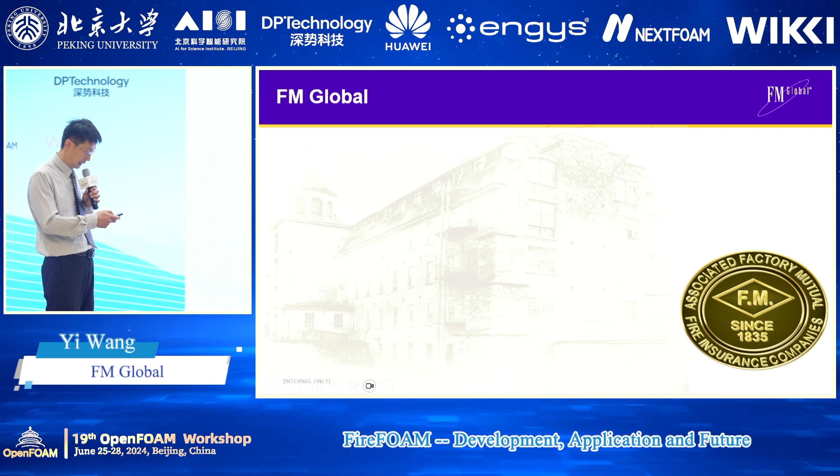Okay, first, what is FM Global? Who is FM Global? FM Global was established around 200 years ago, 1835. We are the largest insurance company - only problem is nobody knows about it, because we don't really insure individual properties: no cars, no residential houses, no health insurance, no life insurance, we don't deal with that. We only specialize in commercial and industrial properties. If you happen to work with one of the large corporations, like Huawei or Intel or Boeing, the likelihood of your company being insured by FM Global is about 30%. That's why we are the largest insurance company in this industry sector.

The company believes the majority of loss is preventable. This loss prevention is achieved by research and engineering. That's why our work is relevant - we can see how our CFD work comes into play, right?

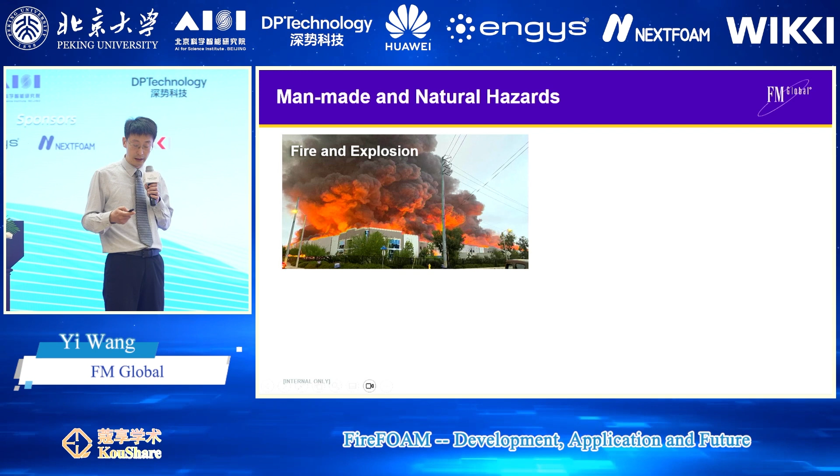So the kind of hazard and risk the company deals with is fire, explosion, and also equipment hazard. There's a picture that's missing, I don't know why. But also all kinds of different natural hazards: earthquake, hurricane, wind, flood. But fire and explosion actually account for roughly 50% of our loss as an insurance company. So it's very important for us - that's why we need to understand our risk.

This is a typical problem our engineers are facing. When they walk into a client facility - looking at this kind of warehouse, distribution center, or manufacturing space - we basically see a lot of combustible material, which could be anything: plastic, battery, cardboard, wood, fabric. They can also be stored at certain heights, under certain ceilings, with all kinds of different configurations - the flue space, the aisle - all those things matter in terms of how fire develops and how big the risk will be.

And also we need to figure out the suppression. Basically, our engineers will ask: how bad will the fire be if there's ignition? That's a risk evaluation. Will the sprinkler, the fire protection, work if there's a fire? If not, what do we need to do? Should we change our design? Should we change the protection? That's risk mitigation. Or should we change the storage configuration? And also, if the risk is too big, what should we tell our underwriter?

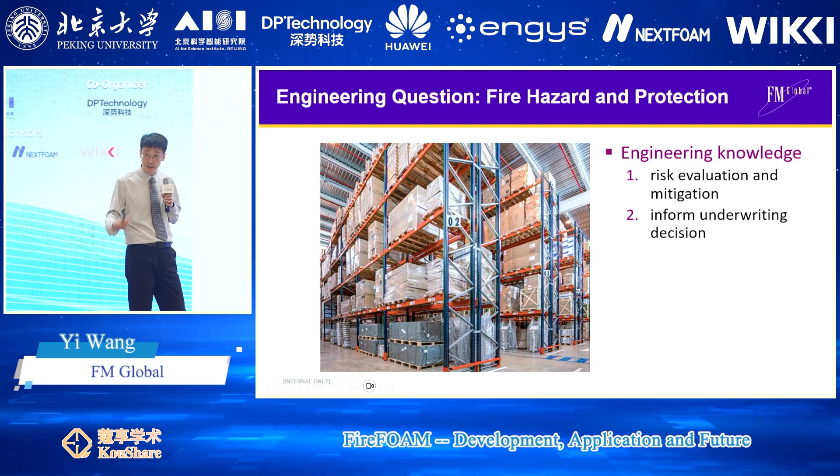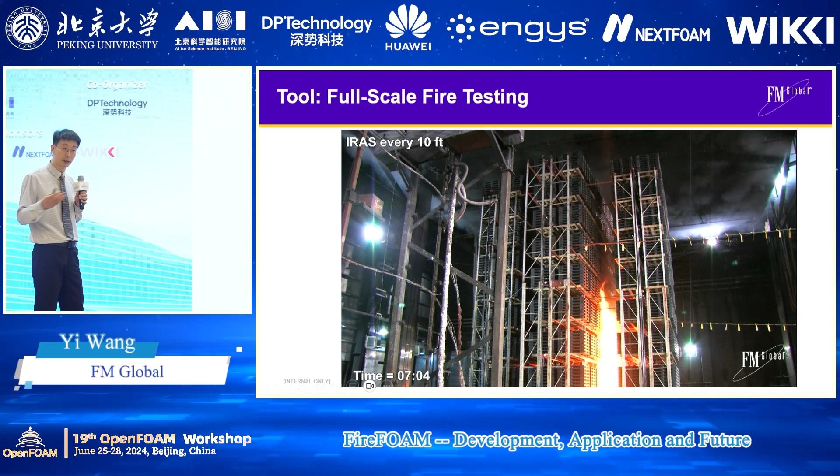We have a tool to help us. The tool is typically full-scale fire testing. Basically, we know what material is being stored, and we reproduce it in our lab, which is the largest lab in the world.

For this specific case, it's 40 feet of storage, 8 tiers, under about 45 feet of ceiling. The material is plastic, and we are putting a sprinkler every 2 tiers. We call it in-rack sprinkler, so there's a pipe inside the rack storage.

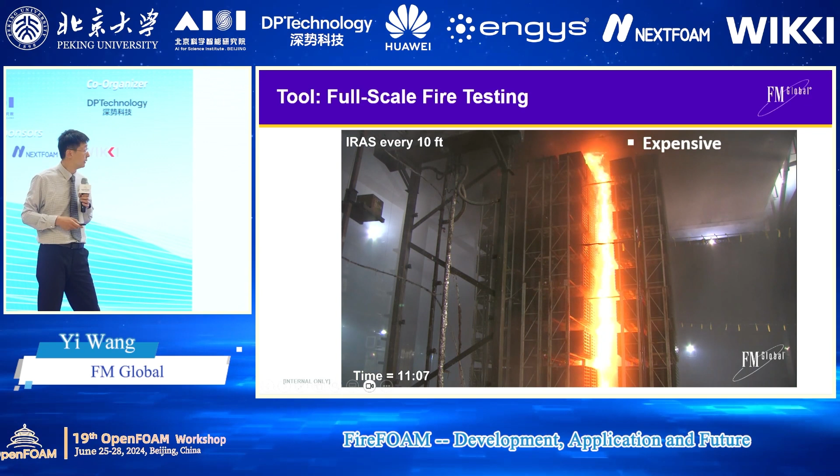So we want to look at how the protection works or not. As you can see, there's something happening. The experiments are very expensive - it's more than $100,000, taking several weeks.

And it's very hard to instrument. Imagine putting a thermocouple in the fire - it's going to be burned. And the laser diagnostic wouldn't work. If you have a good camera or IR camera, you might see through it for some time, but when water comes down, visibility, even for IR camera, you don't see a lot.

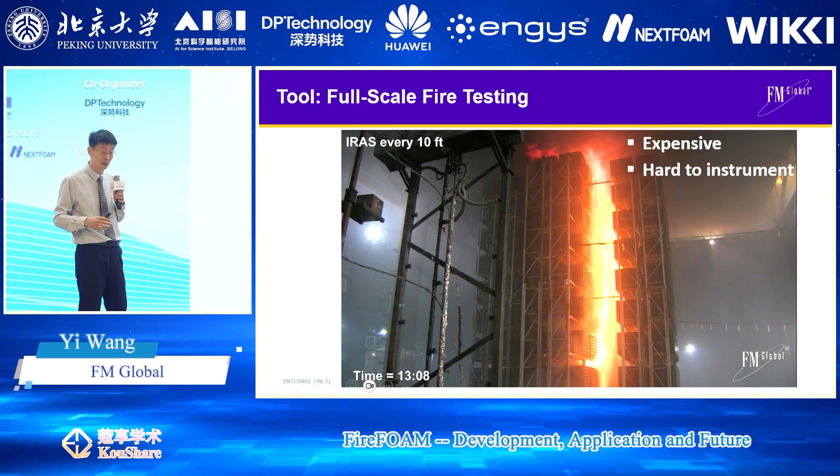We're basically getting a global solution as to whether the protection is working or not. Then there's tons of parameters in the real world, in the design. Everything will change - the behavior, the nonlinear behavior, coupling of the physics. We don't really understand a lot.

So to change that, we want to build a predictive model. That's why a lot of industry are doing CFD - that's one of our reasons. This is our goal: we want to build a predictive capability for industrial fire and suppression, like this.

But when we started back in 2008, that capability wasn't within OpenFOAM. Henry Weller sent me a code - we just developed buoyantFoam, which is pretty good for buoyant flow. That's a good starting point. It actually is. And at that time, in OpenFOAM, there was a premix flame solver, based on Henry Weller's PhD research.

However, fire is really a non-premix flame, so we need to build a combustion model from pretty much scratch, based on the fluid mechanics turbulent buoyant flow solver.

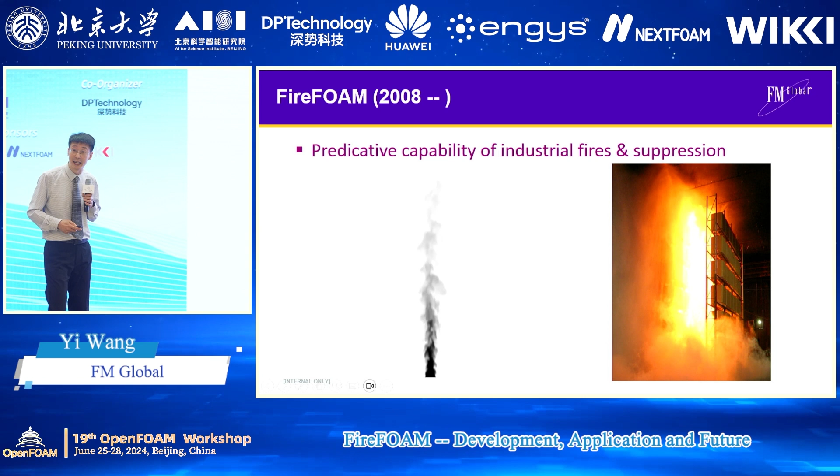So where we are now: for selected material, which are important to us, we can do fire growth and fully coupled fire suppression for pretty much any arbitrary geometry and height configuration. We can look at the ceiling sprinkler activation pattern, ceiling temperature, heat release rate, different angles.

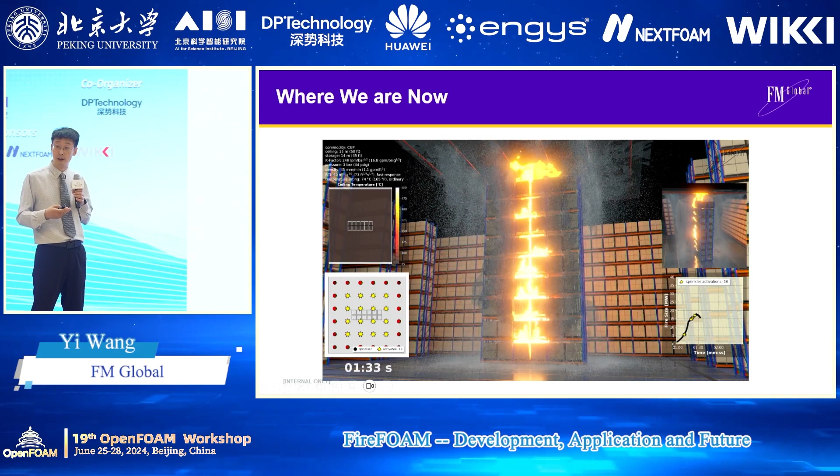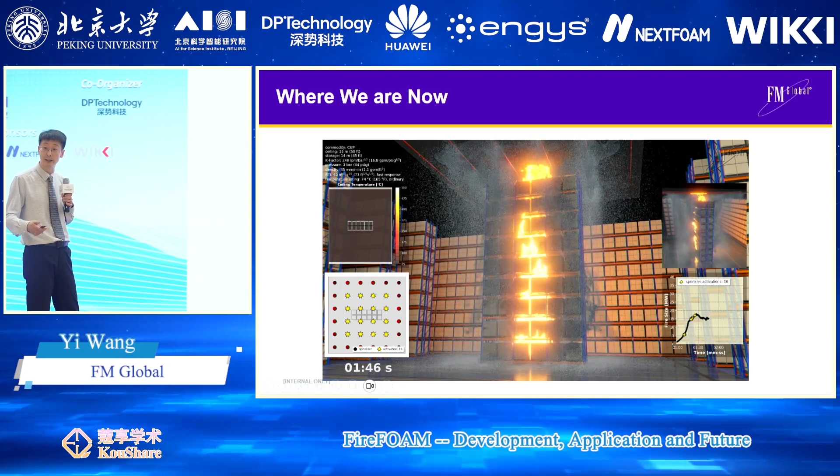We use this to design the protection, but also to communicate to our engineers, to educate our engineers, and also educate our clients. There's a lot of pre-compiled simulation scenarios, so our engineers could show this to clients to say, hey, this is why your protection is not adequate. There's a what-if statement, a scenario.

Basically, if you change a certain parameter and certain protection, you could change your hazard level, reduce your hazard. So you gain some credibility. Think about it - if one engineer who has never done large-scale testing wants to convince the CFO to invest $10 million in a fire protection engineering project, with this kind of tool, it's much more powerful.

Now going to some technical part. What is FireFOAM? Different people have a different definition of FireFOAM. Certainly, FireFOAM is a solver within OpenFOAM, but it really is a package.

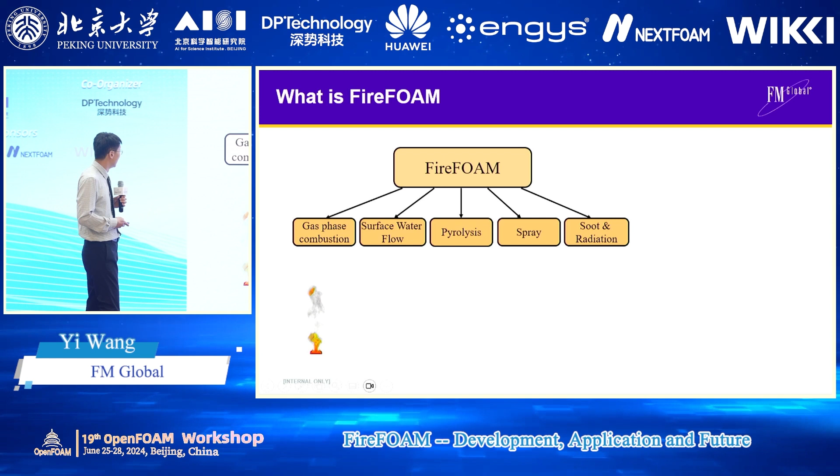To us, FireFOAM really couples all the things in the gas phase, the liquid phase, solid phase, discrete phase in the spray, and also handles thermal radiation, which is wavelength and direction dependent. All these different phases are achieved in a multi-region model. Basically, the solid field has its region and mesh, the liquid film has its region and mesh, and the gas phase has its mesh. So this multi-region mesh is coupled through boundary conditions and mass transfer and energy transfer.

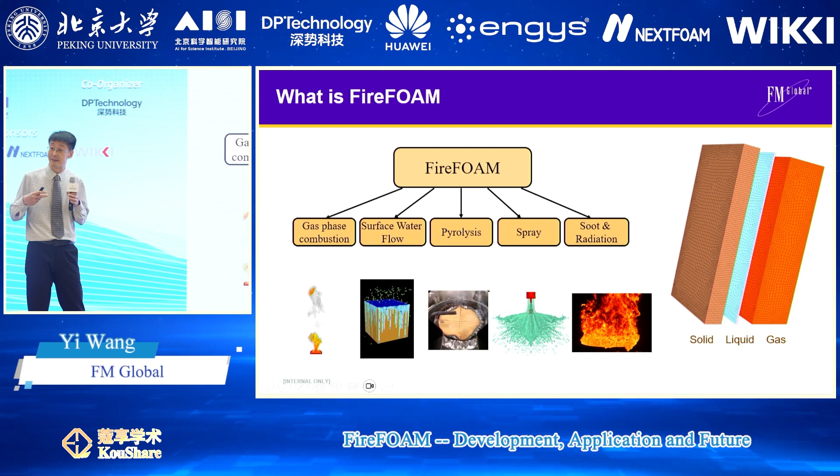I like to call FireFOAM a 4M model. It's multi-region, as we just talked about. It's capable of handling multi-phase flow - again, solid, liquid, gas, discrete - and couples all this physics, dealing with multi-scale, both in terms of length scale and time scale.

We need to model a warehouse about 30 meters high for about half an hour to an hour. This is a huge simulation. And sometimes the time scale of the flame, heat transfer, and the water droplets is really small.

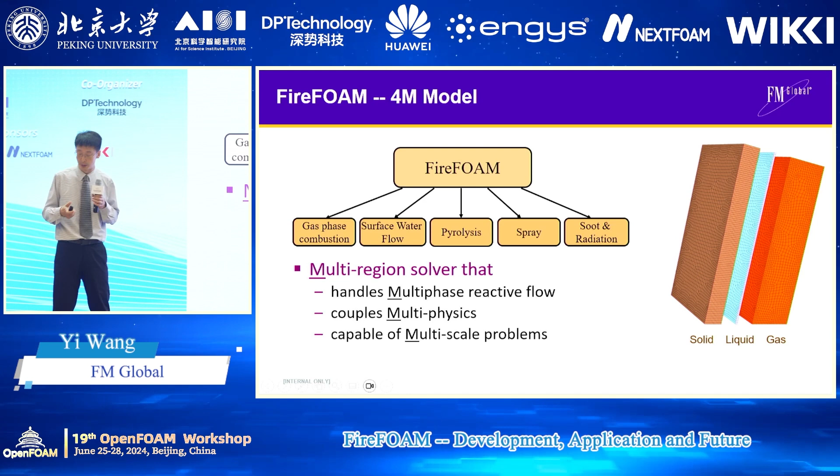Before handling the big coupled problem, we need to look at sub-physics to tackle model development, co-development, and also the separate effect validation.

So here we start again from thermal plume. We look at turbulence model, entrainment, subgrid scale modeling. For fire plume, we look at flame height, entrainment, and when it hits the ceiling, the ceiling jet. Near wall, we want to look at heat transfer, convective wall function, and soot and radiation in the fire. All this heat transfer and fluid mechanics are key components of fire growth before we can couple it together.

In the suppression part, we also started by working on fundamentals. With a sprinkler, we need to understand atomization, which is the input condition: droplet size, velocity, flux distribution, either from experimental measurement for any sprinkler type and pressure, or from a CFD VOF simulation, to provide the input condition we need for FireFOAM.

The next stage is spray plume interaction. Basically you have a droplet, Lagrangian particle tracking, how the spray will penetrate through a strong fire plume and land on the top of the solid surface as a wetted surface. And when the water forms a film, how the water film flows, those physics need to be developed. There's also a gas phase flame extinction when there's not enough oxygen, not enough high temperature, and water cooling, and how to model that extinction.

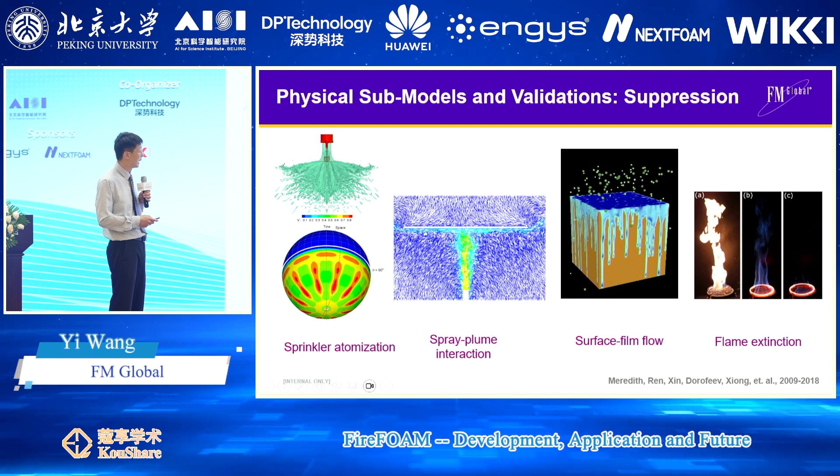I'm not going to go into all these details of validation, but we have to understand we need a lot of experimental data and separate effect cases, canonical problems, to validate each part of the model, each submodel.

I want to highlight two very important submodels within FireFOAM. One related to fire growth, the other related to fire suppression.

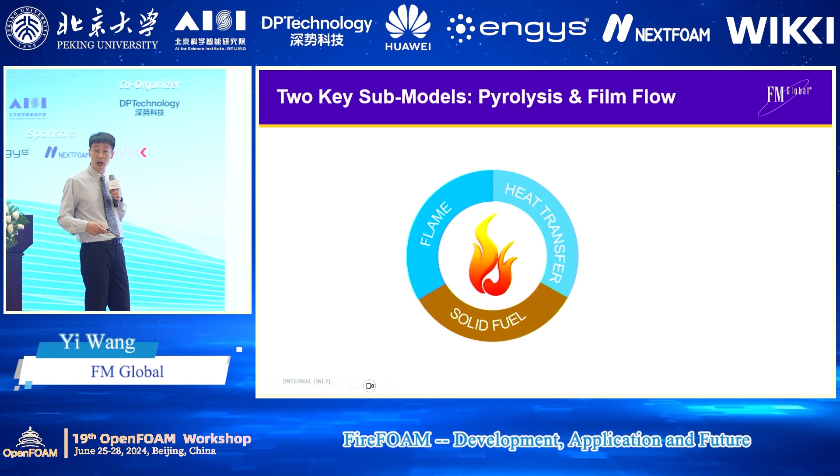The difference between a combustion problem and fire is combustion is an open loop problem. You provide the amount of fuel, you look at how this fuel burns, the power, heat generation, temperature, and pollution. But with fire, we never really control the amount of fuel coming into play. It's all dependent by itself. So the gaseous flame generates heat, and heat transfer back to the solid fuel will determine how much the flame spreads and burns. The pyrolysis of the solid fuel feeds the gas phase to burn. That's one of the keys of fire modeling.

Second is suppression based on water. I'm going to touch on that later.

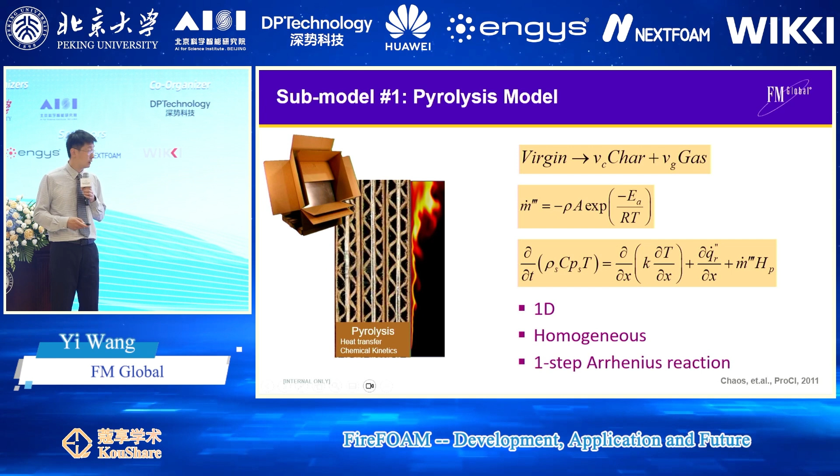What we really want to do is try to simplify it. The way we simplify it: we first assume there's one-dimensional heat transfer, then we assume the material is homogeneous, then we assume it's a one-step Arrhenius reaction. With this simple assumption, the problem is tractable. If we really want to model every single detail, the problem is never going to help engineering solutions.

When this simple basic model is breaking, not working, we need to think about what new physics we need to add to model the physics. But let's start from simple physics. That's basically the foundation of our pyrolysis model.

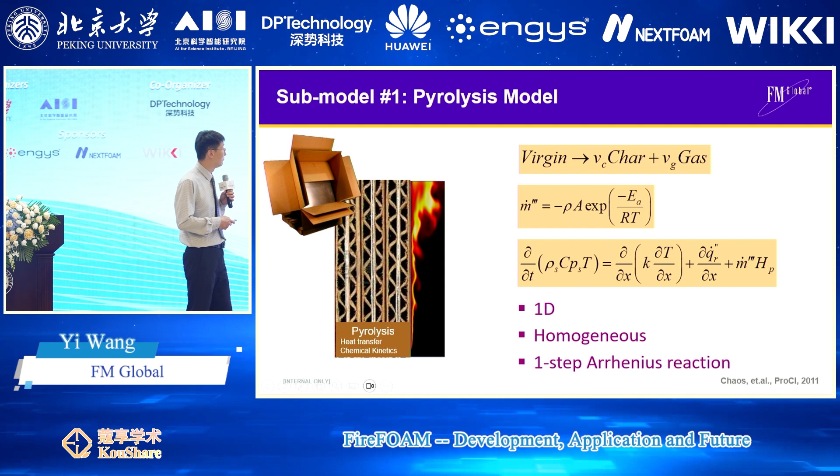With this equation set, really the problem is how to get all these parameters. There are about 10 parameters: heat conduction, CP, the Arrhenius form parameters. What we do is put material in a bench scale apparatus to burn it at different heat fluxes. We measure very important output parameters, for example mass loss rate as a function of time at different heat flux levels. We also measure surface temperature, back surface temperature, all these important parameters we want to capture.

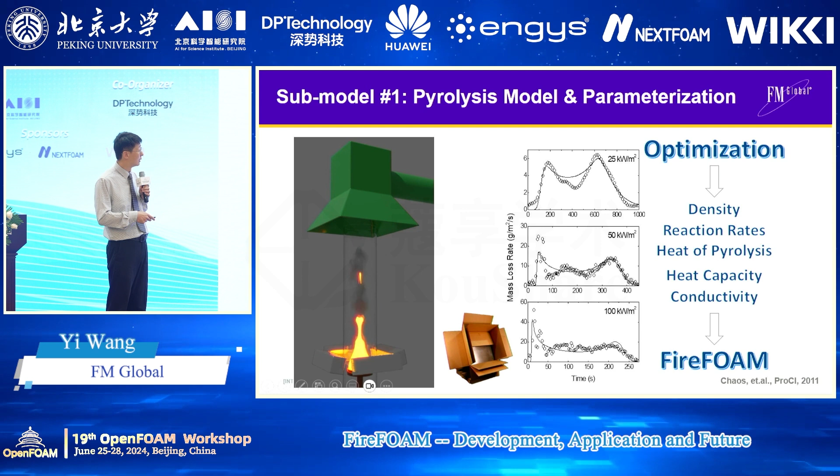What we do is plug this into our model and do reverse engineering to get the property. If this optimized property could provide exactly the same behavior to a satisfying level, we think we are all set.

We plug our pyrolysis model and property into the gas phase solver, the FireFOAM solver. The first validation is the parallel panel flame spread, vertical flame spread.

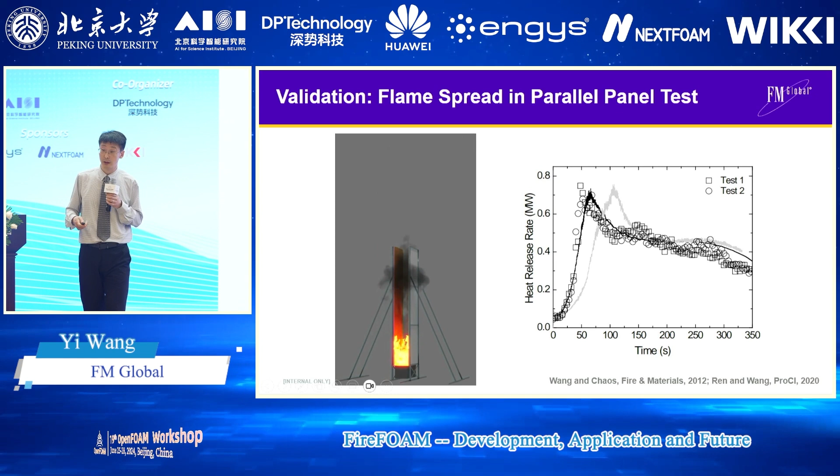We compare the model, which is the solid line, with experiment. We have two repeats. Don't look at this gray line, it's a sensitivity study for different wall functions. But what we can achieve is, okay, the area under this curve is the total energy generated. It's pretty good. The maximum fire size is predicted.

The time to start and the slope are good enough, and also the decay behavior are well captured. This is actually the simplest possible situation that we can model. The material is relatively simple, the configuration is simple, and there's not much feature you need to capture.

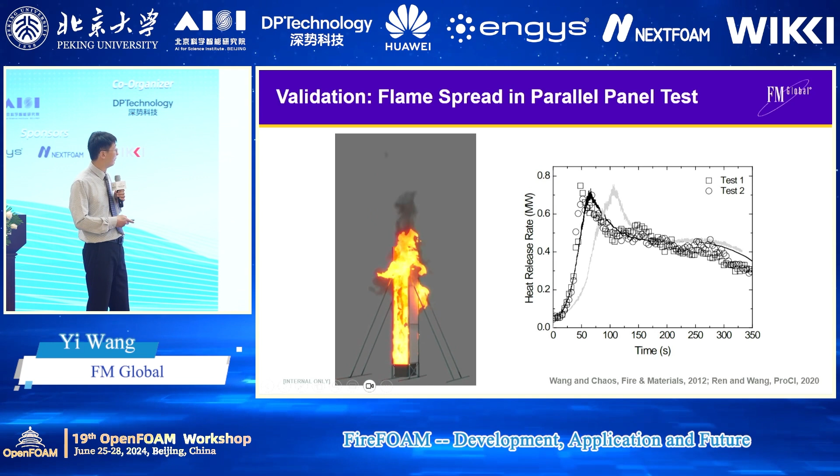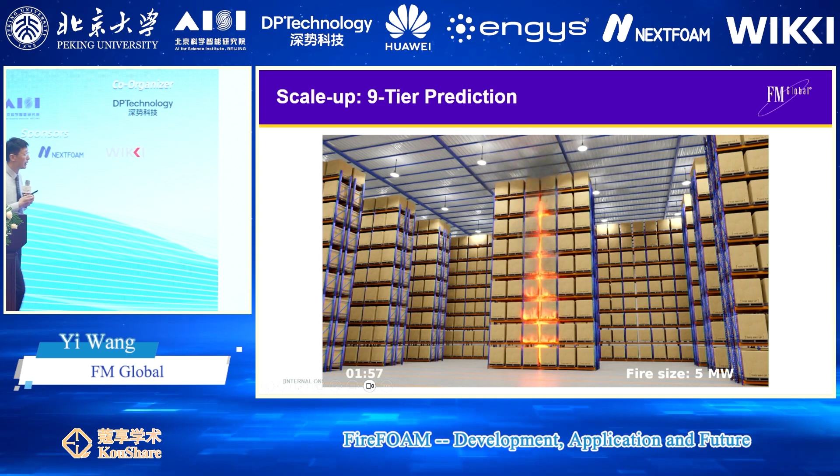I think you can imagine pretty soon the fire growth is going to accelerate, and it's going to burn the whole field pretty soon, within several, maybe a couple of minutes.

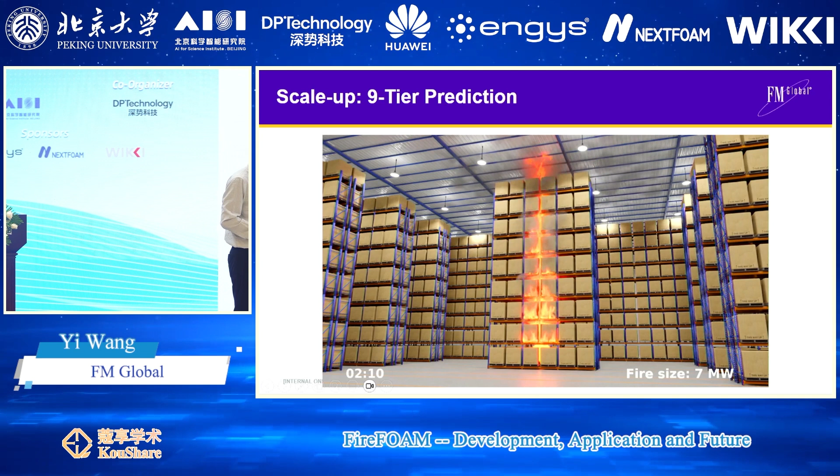The second important component in FireFOAM is this liquid film model. We need this liquid film model to couple the whole suppression, and even couple between the solid phase, gas phase, as well as the droplet discretized phase.

This is also a free surface flow, but we don't want to use multi-phase VOF to track all of them. It's computationally very expensive, we don't need to do that. The simple assumption is we just assume the liquid film is very thin. We neglect all the gradient within the film.

We only integrate the equation in the vertical direction. So we're getting the equation for thickness, which is mass conservation, and the equation for velocity, and also for temperature.

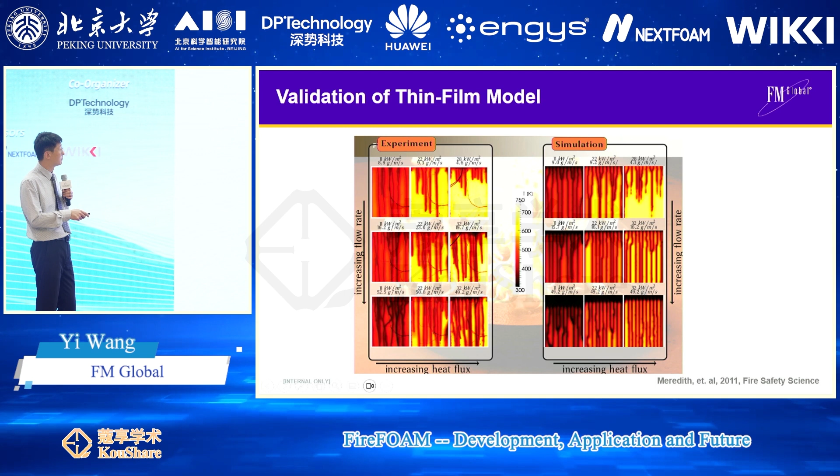And also we actually have a heat flux heater to heat the water film. You can see when we have a higher heat flux, there's a more dry space, especially in the low water flow rate conditions.

All right, now we have fully coupled simulation for selected material. I showed an example of class 2, which is corrugated cardboard, but we also have a model for more complex fuels.

We are using this to design sprinklers. Here it's plastic cups, inside the box we call CUP or class 3 CUP commodity. We also have plastic pallet, which is uncartoned material we call uncartoned, unexpanded plastic.

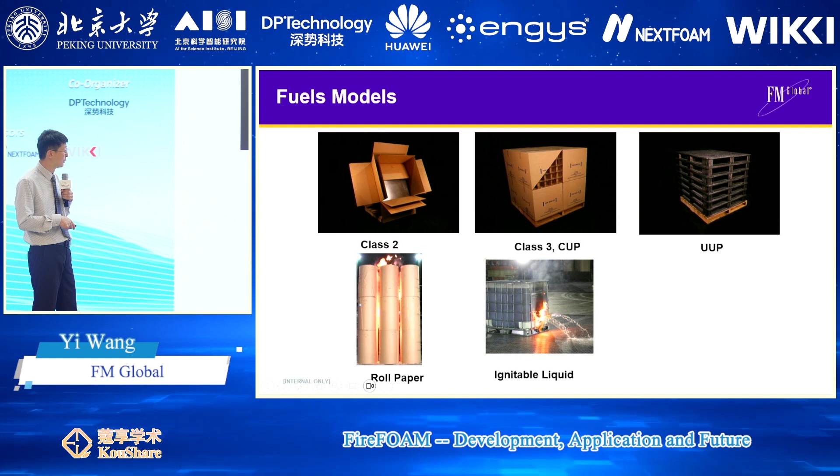We also have a model for roll paper, a model for ignitable liquid. I'm going to show some of them. And we're working on a battery model, a fuel model for batteries too.

How do we do more complex fuel? For example, for this configuration, we call it CUP commodity. Outside is the same carton box, so it's this thin layer in the schematic. We have a lot of cups within this three-dimensional space, and we keep the same model for the liner board. But when the liner board burns through, we need to understand how these cups burn.

What we are doing is we're getting one of these units, putting it into our bench scale burning apparatus to figure out its burning rate.

Instead of dealing with all the detailed heat transfer between the cups, three-dimensional heat transfer radiation, and the divider of cardboard, we actually treat it as one unit we call an outer unit. It's attached with a one-dimensional pyrolysis region. Whenever this carton box outside is being consumed, we just trigger the burning of this kind of unit.

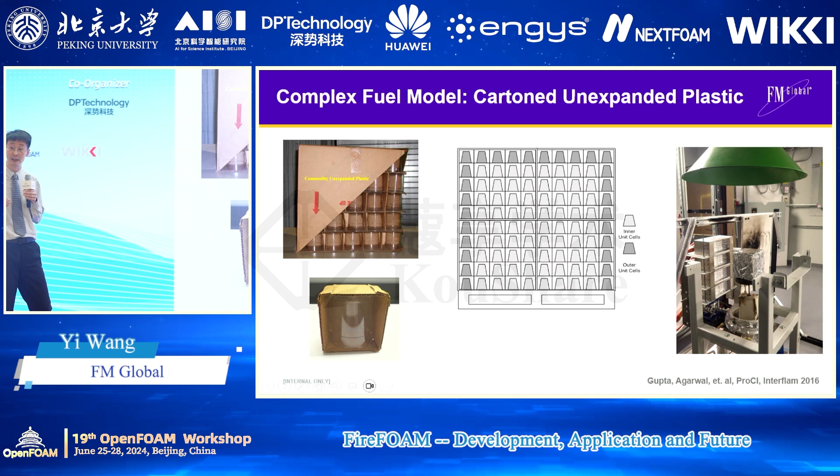Of course, when this outer unit burns through, we are burning really in depth. We are dealing with a more global model, which we call inner unit cell, to really distribute all the energy into all the different burning areas when it's burning through. So this kind of combined first principle modeling with some phenomenological engineering model really hits the balance of fidelity we need for engineering problem solving.

Another very interesting model development is paper rolls. We insure a lot of paper manufacturing facilities, they really are trying to store this big paper roll they call mother roll. Each roll is about 2 meters high and about 1 meter diameter. It's huge. Then when they get this roll, it's stored in the storage, then they kind of cut it to different shapes for different purposes and sell it.

The paper has different material. You could have a newspaper, you could have a kraft paper, you could have tissue paper. They burn differently, and you could also store them differently. So sometimes they have a gap, sometimes they are butted to each other. All these small things change the fire growth dramatically. We need to model that.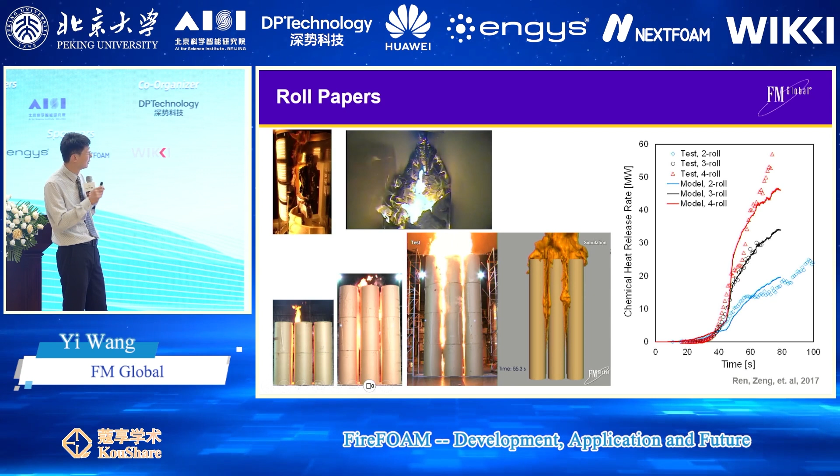But also this delamination physics is not one-dimensional, not a local phenomenon. You can see whenever you break in a large roll - this is a large experiment, we're putting a bullet camera in between - you can see you have a propagation of peeling, and you have to capture those effects.

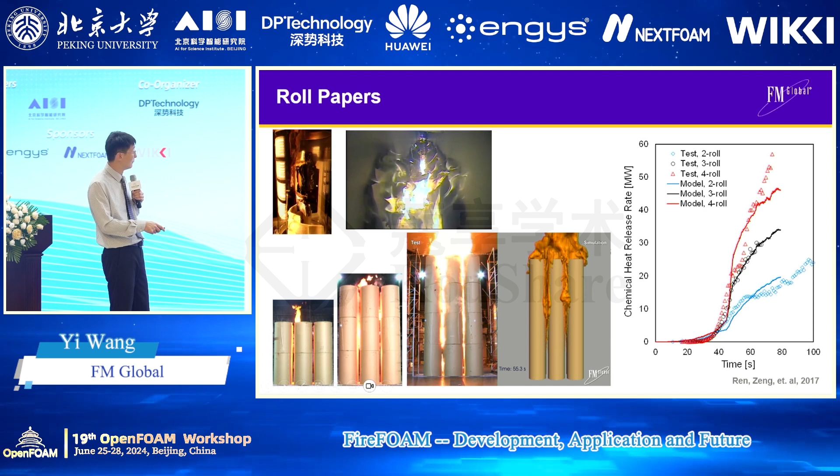We need to be able to really capture, predict, and validate the large burning. So we actually do the validation for 2-roll, 3-roll, 4-roll, similarly. This is a comparison between modeling and experiment.

So again, that gives us confidence that we can do prediction. The prediction would be, we know how the roll paper burns when it's stored in 42 feet under 60 feet ceiling, but we don't know how it burns when it's stored in 82 feet under 100 feet.

This is our proposal from our client. We want to store this way. This is the largest experiment we can do in our test facility.

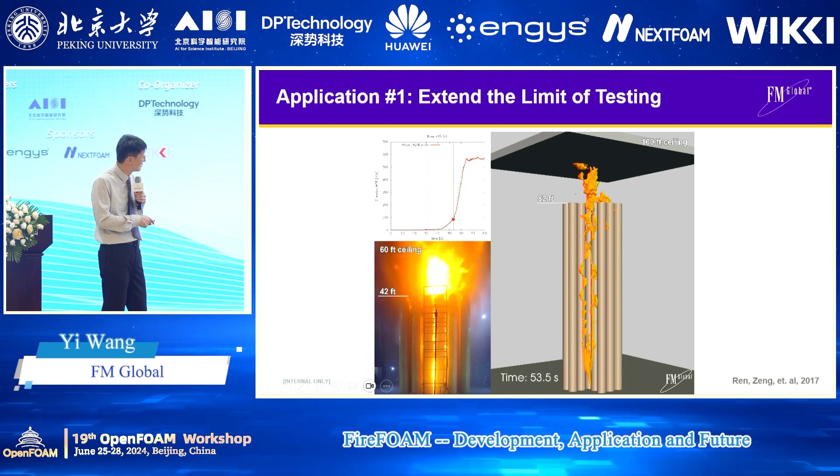So of course now you already see water starting to put down. The fire is reduced already. Otherwise our building will collapse. Basically you can see this is the time you need water to come down. This is the time that very fast flame spread.

When you get into this range, it's a 30 megawatt per second fire growth rate, very, very large. It's like a big generator.

We can extend, using model to extend application for our limited experiment. This has been a theme for our problem solving. We have been using the model to solve all kinds of different problems that our clients are facing.

For example, one problem is when ceiling sprinkler is not adequate, how do we design in-rack sprinkler at a different interval to adequately protect. So it's every 2-tier, every 1-tier, or every 4-tier, how to optimize this design. We're using modeling to do that.

Also, a lot of industrial property warehouses have a slope ceiling. How does the slope ceiling change the sprinkler activation pattern? You can imagine when fire will spread to both ends, but the hot smoke only goes to the left region because of the slope ceiling. The water will come down here, there's no water coming here, then you'll have a disaster.

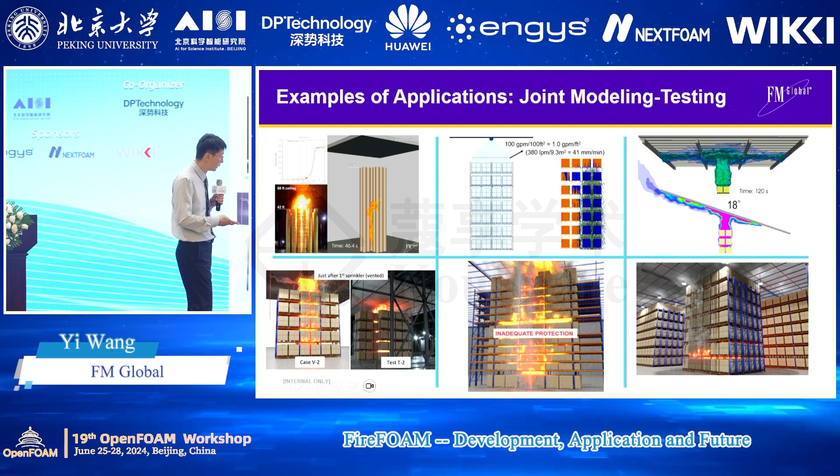This is another two different problem examples. I don't want to go into all the details. Let's move on. I want to highlight some ongoing research, which is very exciting to me.

The first one is ignitable liquid spill and spread. This is common in a lot of facilities in industrial, manufacturing space. All kinds of different liquids, used for painting, for hydraulic systems, for insulation.

They're all stored in this kind of container called IBC. I think it's about 1 meter by 1 meter cube. That's a lot of liquid. It's transported by the forklift.

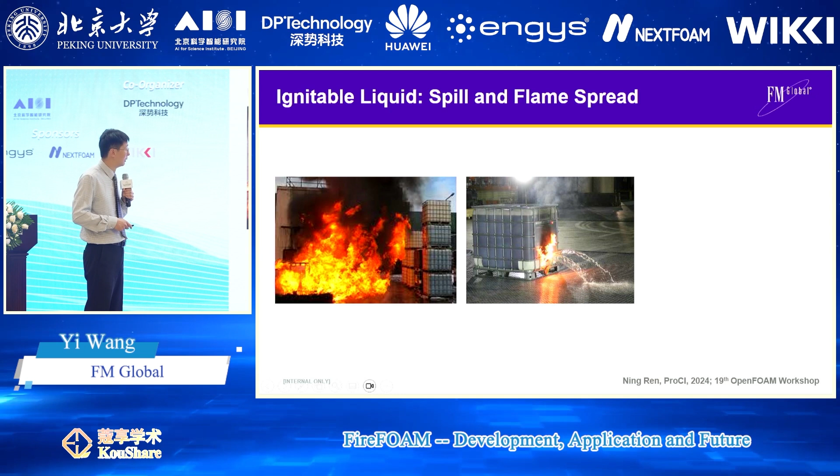What if there's an incident, there's a spill, and there's a hot surface or some ignition source? What's the scenario? It's important for us to know, but also important because when plastic burns, you can see it drip and form a pool, and it's almost exactly the same phenomenon. You have a spill and flame spread, but just different properties, different viscosity, different density. You might burn differently with some other liquid.

So we don't want to use VOF to do the interface tracking, to resolve everything for the same liquid. We recognize we have our model. We can do this kind of spill for water, a pool. Can we use this for ignitable liquid?

The answer is yes, but no. Yes, because we really want to take advantage of our 2D film model, but it's not adequate, because the assumption of a thin film model—that there's only bulk velocity and bulk temperature—is not adequate anymore. If you assume a whole layer of the liquid is the same temperature, you never really get evaporation, never really get the burn. You underestimate the hazard significantly.

So what we need to do—we don't want a 3D mesh. What we want to do is build an embedded mesh to do the one-dimensional heat conduction. But still, we have this two-dimensional convection, which is also important in heat transfer.

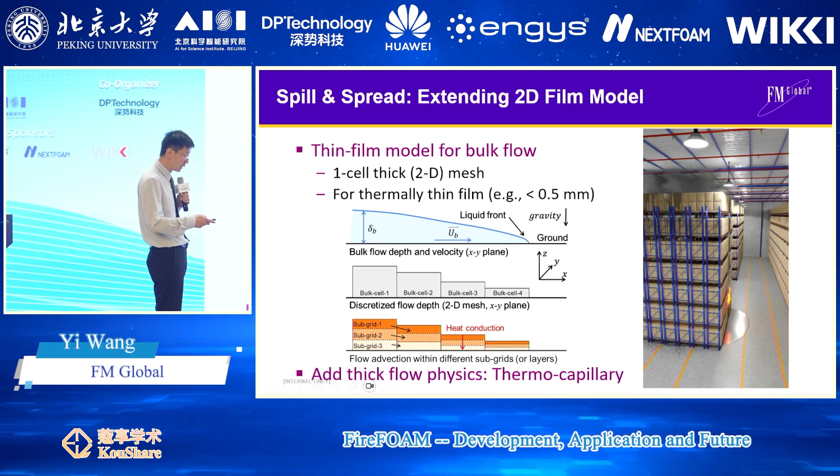Which is thermocapillary convection. This is the surface of the fuel. There's actually this kind of motion-driven circulation, driven by convection, driven by surface tension force because of temperature gradient. Basically, you have hot places, you have cold places. There's a flow going in this direction, so there's a circulation underneath the surface.

So here we are showing experiment and our modeling. In the experiment, we can have something like a velocity tracker, location tracker. You can see the surface is in motion after heating up. The model can actually predict similar velocity at the surface.

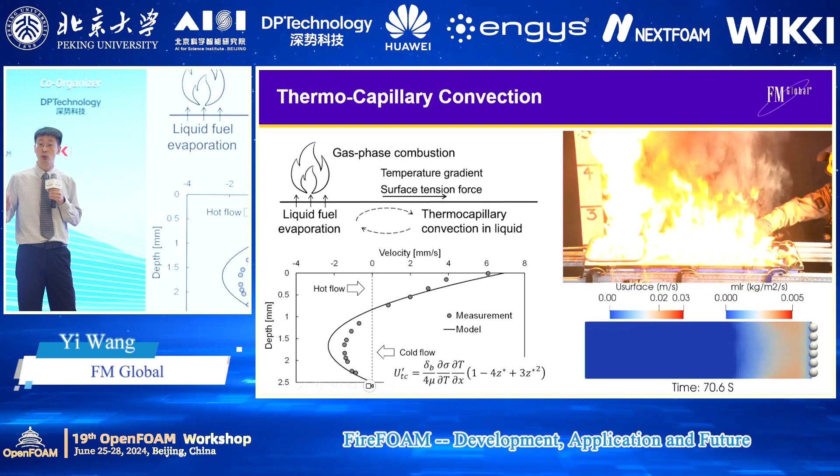The creative part of this is we are not solving the three-dimensional fluid mechanics region. We are building an analytical solution, and it's good enough to capture the circulation. So we have a one-dimensional embedded subgrid-scale heat transfer, but also a theoretical solution to capture this thermocapillary convection. The end effect is we can still use a two-dimensional mesh to deal with this complex spill, free surface flow, and this complex thermocapillary convection.

Okay, this is validation. We're looking at the flame front location as a function of time, for two different kinds of fuels. Let me try to play the video. I don't know why it's not playing. Okay, this is actually a pretty nice video.

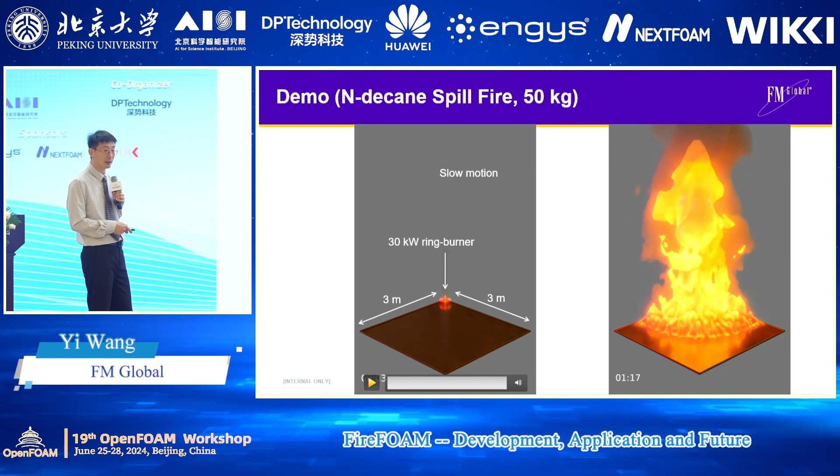And the important thing is thermocapillary convection will cool down the burning region, but heat up the preheating region. The burning rate at the fire origin will reduce, but the burning rate at flame spread will be enhanced by this underneath convection beneath the surface.

Okay, this is also an important component when we model this kind of plastic burning, as I mentioned before. So when you have plastic burning, you have melting, dripping, forming a pool. This pool will spill. We're actually using exactly the same model framework embedded in this model to handle part of the physics.

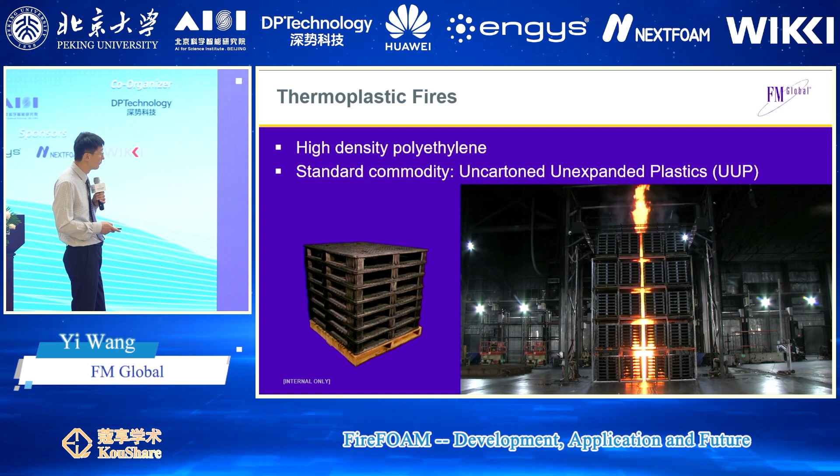Again, this plastic is high density polyethylene. This is one of the standard commodities for us to design certain sprinklers for certain commodities. Pretty soon you're going to see this experiment where we apply uniform water on top of the commodity. You can see the gas-phase flame getting quenched, but this part of the flame is very strong, still going to spread to part of the commodity later, even with this water flow rate.

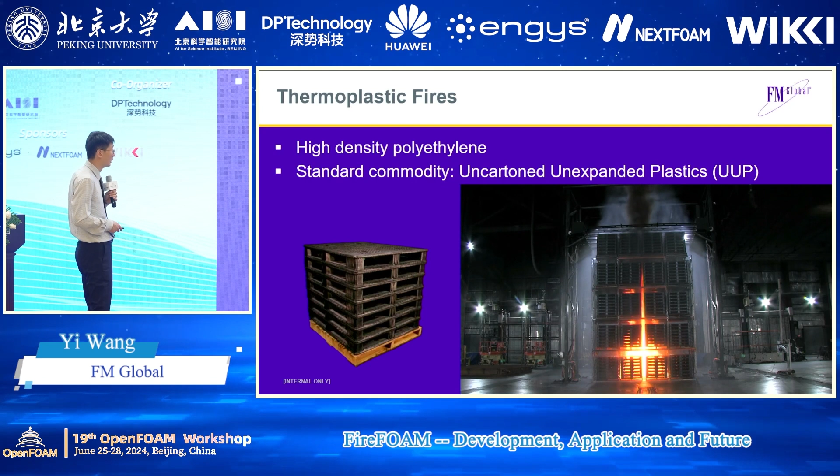All right, how do we model that? There's two very important physics. One is when plastic melts and burns through, there's a deformation of the geometry - your geometry changes. This change of geometry is very important when dealing with radiation heat transfer. Imagine you have a matrix here, all the radiation being blocked. You really don't see the flame radiation a lot with this kind of configuration. But when you burn through, your heat flux significantly goes through. So you have to model the geometry change. The dynamic mesh comes into play for this kind of simulation.

The second is the phenomena we just talked about, the pooling and spread. If you give a close examination of this material, you have what we call the frame region, which is very thick. After burning, this region is still mostly intact. Structurally, we have what we call the lattice region, where the material is much thinner. It burns through quicker, so we need to handle this.

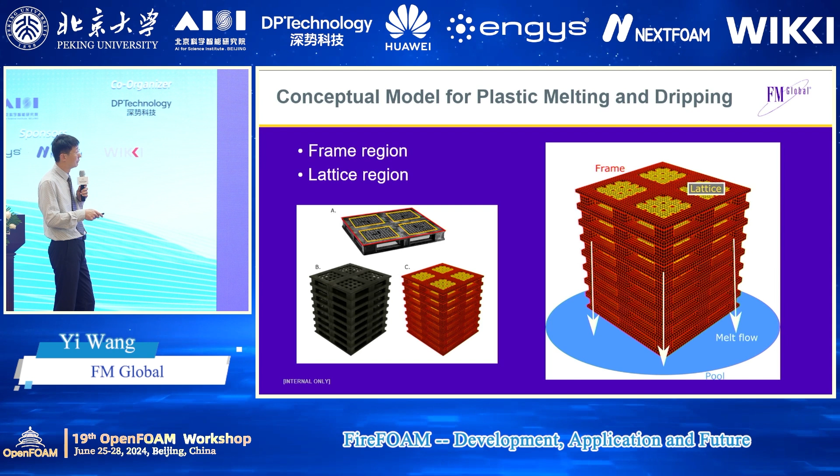Conceptually, we divide all the material into two regions: the frame region, where there's no geometry change and no dynamic mesh, and the lattice region, which we need to deal with differently. In the frame region, we pretty much use the same liquid fire model we just talked about to deal with the liquid fuel. On the solid side, we basically have one-dimensional heat conduction.

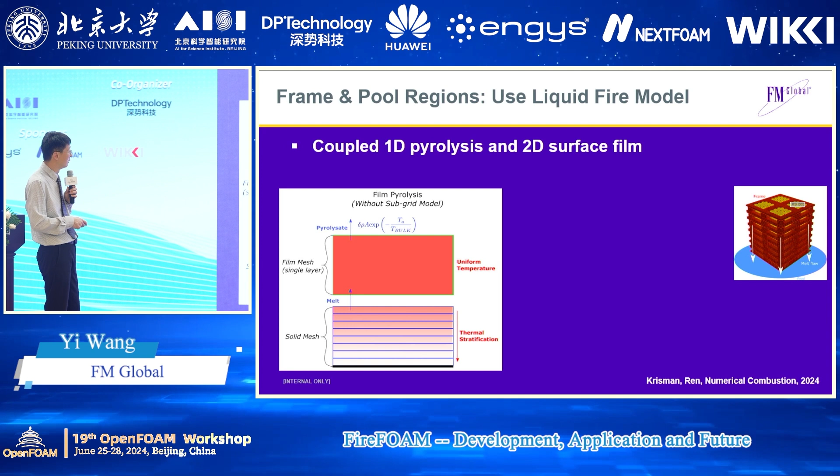And on the liquid side, we basically have a 2D mesh for each local cell. It's a lumped model - we know the thickness of the liquid, the temperature and the velocity. On top of that, we're building in-depth embedded one-dimensional sub-grid heat conduction, and also we have this theoretical solution of thermocapillary convection.

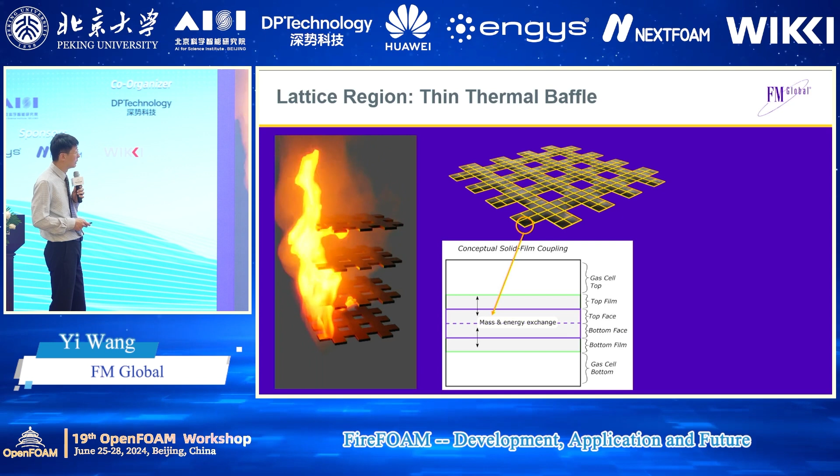Okay, this is a demonstration of how we deal with this lattice region, how we deal with the geometry change. We model the lattice region with a very thin thermal baffle, so we don't mesh the solid thickness. We basically use an infinitely thin material, and each baffle is attached with a certain thickness of solid.

This solid, when heated up, can have part of the material changed to liquid. This liquid is actually modeled by a local parcel, and this local parcel droplet is interacting with melting from solid, impingement from other layers when dripping down, gasification, burning and dripping. So you can see here, you already see the dripping, the pooling.

You can see as soon as the solid material reduces to a certain threshold, the baffle will disappear. We're using the attach-detach functionality of a dynamic mesh in OpenFOAM, changing this baffle into an internal face. Then the liquid, the flow will go through.

We basically couple the solid frame region with the lattice region, different region treatment. We can model the fire growth of this commodity compared with experiment. This is experiment, this is our modeling for different heights. This is 1 tier, I believe this is 5 tier.

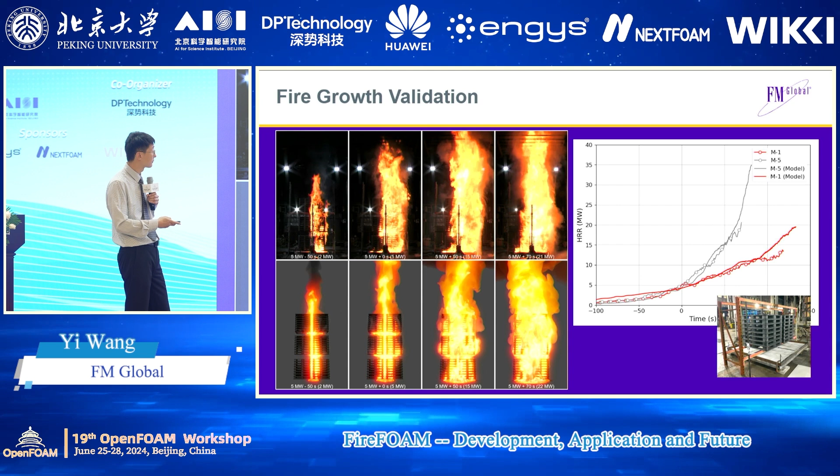All right, just to recap how we do fire growth. We basically have a certain thickness of the film, we call film of the fuel. If this film of the fuel is larger than a critical value, it's in burning regime. If it's smaller than the critical value, there's no liquid, basically there's a solid being preheated.

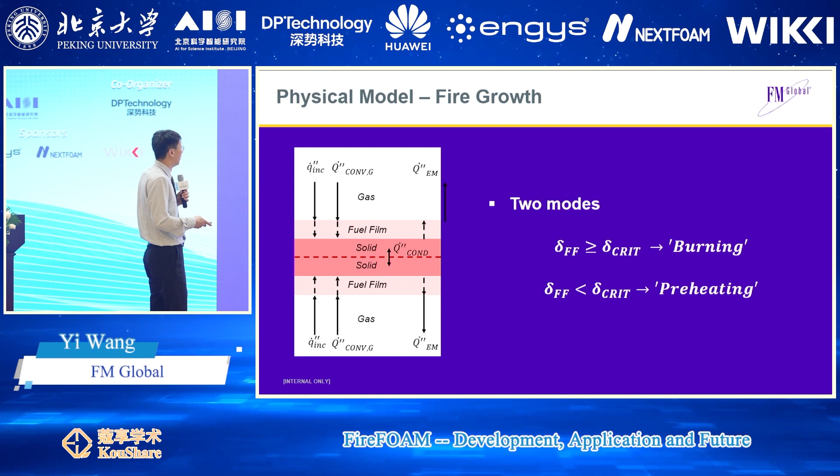But when we do the suppression, there's more complexity because there's another layer of film of water and molten plastic. We need to add another film, and also we need another Lagrangian cloud. One cloud is looking at the dripping of the fuel, another is water. Going back to this same cartoon, on top of the solid and fuel film, we also need to have a water film, which we call a suppression film.

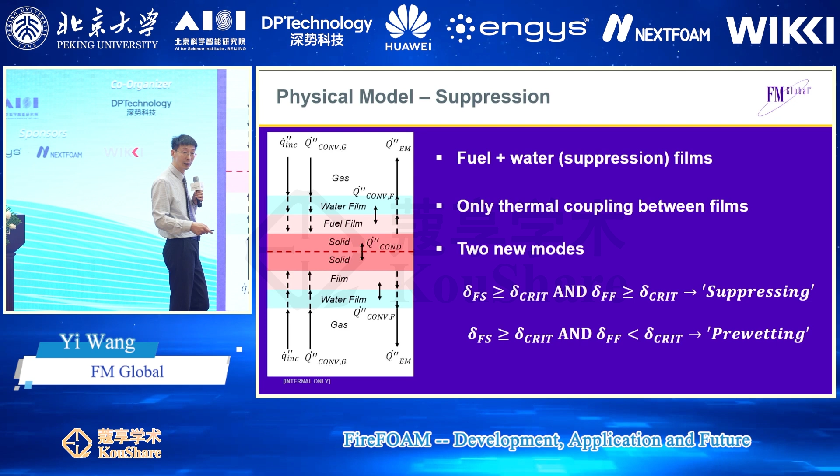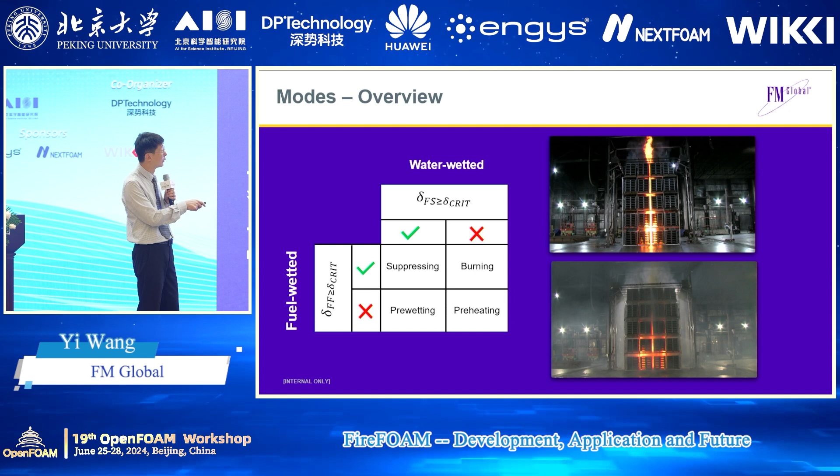Basically, when there's water, the suppression depends on whether the thickness of the suppression film is larger than a critical value, and depends on if there's liquid fuel or not. If there's liquid fuel, it's a suppressing mode. When there's no liquid fuel, that's a pre-wetting mode. So we need to handle this, depending on the thickness of the water and the thickness of the fuel. We have burning, preheating, suppressing and pre-wetting, really dealing with all different locations of the interaction between water and fuel.

I don't want to go into detail, but I want to show a demonstration. It's a similar demonstration for the lattice region. We had a free burn, but pretty soon we're going to apply water at different rates. Here we have a lot of water pouring down. Here we have not enough water. Let's see how...

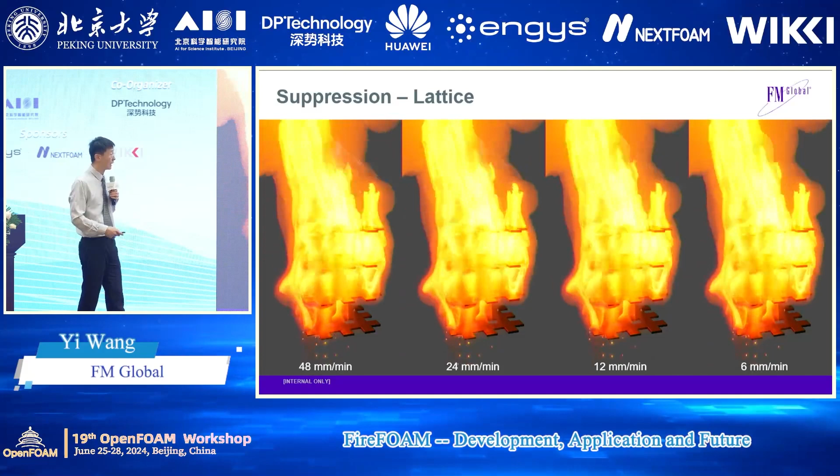...qualitatively the behavior of suppression looks. Now you can see the water. When you have a lot of water, it's suppressed very quickly - hardly any fuel has been burned. When we don't have enough water, you can see the fire is reduced, but you still have burning. But you still have the disappearance of the solid burning material.

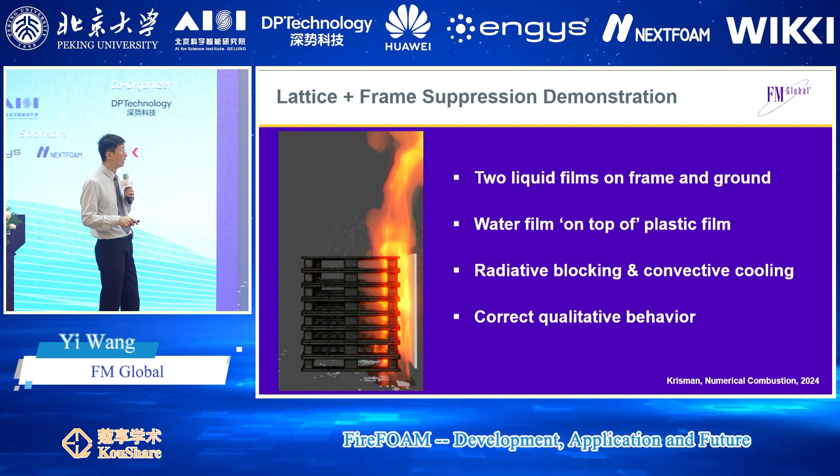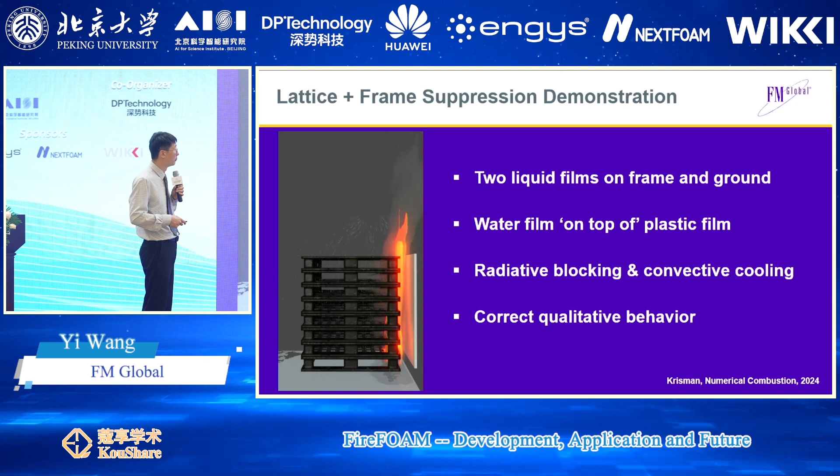Again, when we couple the two regions, the frame region and lattice region, we have these two films and two Lagrangian clouds, and this water film interacting with the plastic film only through thermal heat transfer. There's no other mass transport - it's a simple assumption, but probably good enough. The water film will block the radiation and convection, and does show some correct qualitative behavior.

You can see now this model is really pushing this multi-region coupling, multi-physics coupling to the extreme. You have all kinds of different coupling physics and phases. We are currently in the process of validating much larger scale validation cases for suppression.

I want to talk a little bit about future direction, the opportunities and the challenges we are facing. Now we only handle limited material, which is very important for our warehouse fire protection, but we really need to deal with a much larger range of fuels in a much quicker pace. We need to speed up the development of different fuel models. For example, facade, PV panel - those fuels are multi-layer, multi-component, totally different behavior.

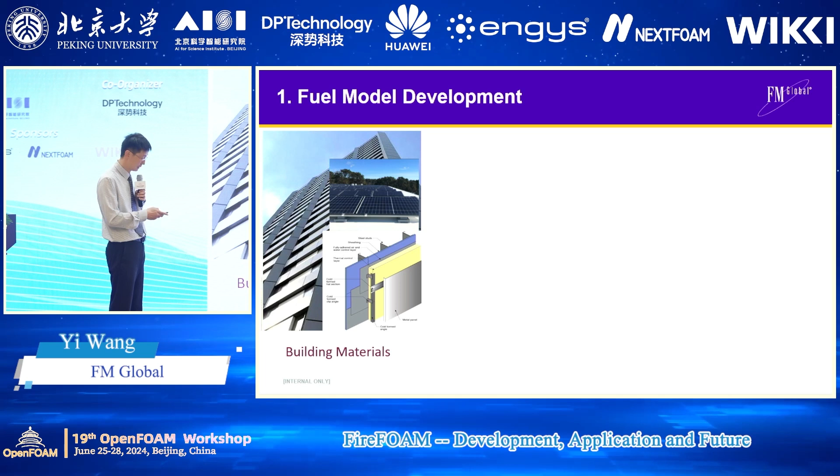Hopefully we can do it much quicker for different fuels. For the gas phase, radiation, liquid phase, I think a lot of the physics are universal. But when dealing with different fuels, we need to develop different fuel models in a faster manner. For example, the open top container is all robotic-enabled facility, and also the water actually has different behavior because this open top container can collect water. The same fuel model would not work anymore.

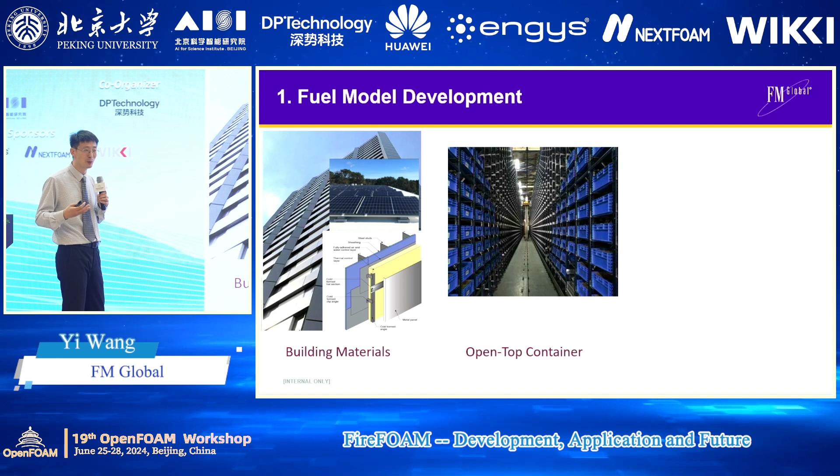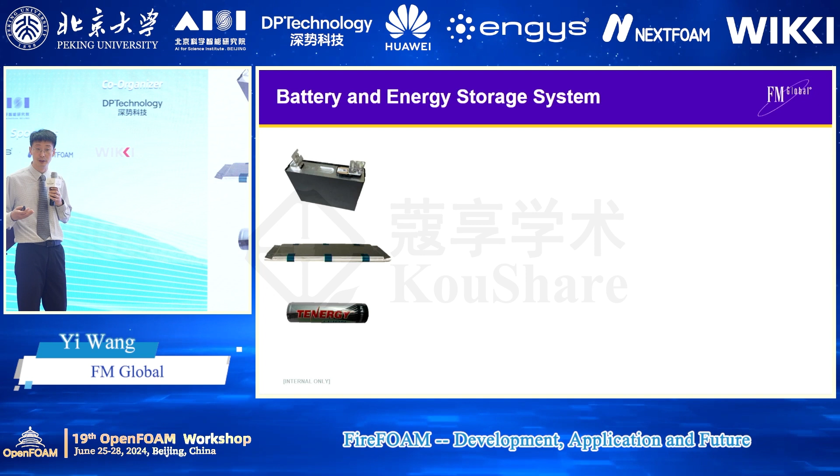Battery is everywhere. We insure car manufacturers, we insure battery manufacturers, so there's a lot of storage of the batteries. We also insure energy storage systems - basically the solar panel farm and wind farm, they have energy storage systems. Different form factor, different chemistry, we need to be able to model that. We treat it as a different solid fuel, only different is they have exothermal reactions inside it.

When it's a fuel, each individual cell being put together in the module, there's some other component. Sometimes there's a gap in between, sometimes there's a plastic in between. They're changing the heat transfer and changing also the burning, the heat loss, heat dissipation. So those details are very important. Again, this is a balance - how we balance the first principle of physics with phenomenological modeling, which is practical for large scale.

When this fuel is packaged in a metal case, it's a compartment phenomenon. There's not oxygen inside. The fuel is burning outside, but there's certain heat transfer mode inside.

All right, this is exciting. Oh, I hope we can show this. It's very nice. Let me try if we can show this video. Yeah, let me try. Oh, too bad. Okay.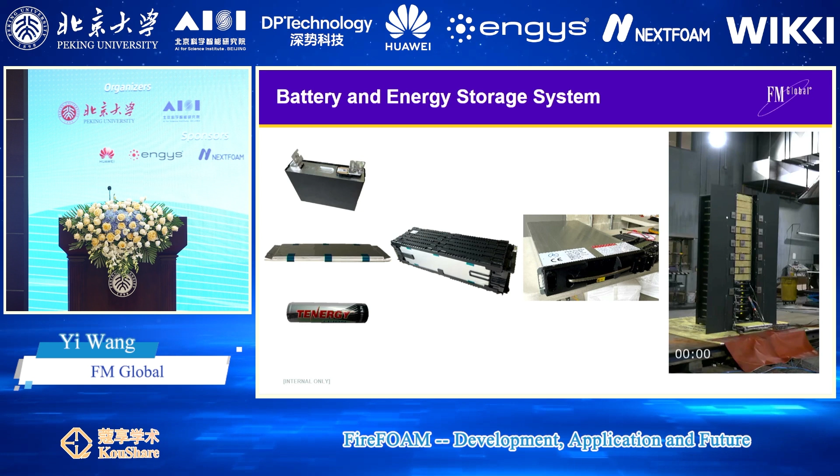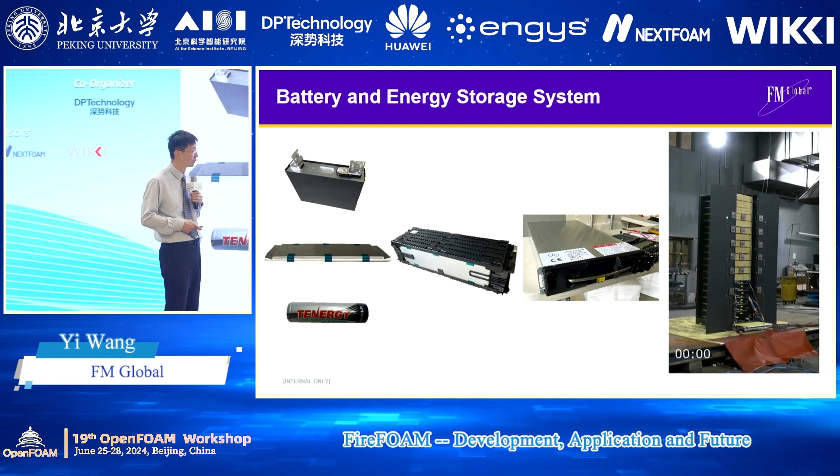I think what I'm going to describe verbally is the ignition. We're going to trigger one of the batteries inside, let it propagate, and after about 10 minutes there's going to be auto ignition, pilot ignition, and there's going to be a flame. The plastic is starting to burn. You have a flame spread, and eventually the thermal runaway of the battery within this container really accelerates, almost like a flashover case - each of these modules will get into thermal runaway at the same time. You're going to see a jet flame project in this direction into about 2 meters long. So it's a huge flame. I hope I can show you maybe at a later time.

Really challenging is that we want to do it faster. A lot of simulations I showed took several days, several weeks. The longest simulation close to a month, using pretty big nodes, typically 200, 300 CPU nodes. It's too long, we really need to speed it up.

One thing we want to speed up is using some numerical tricks, the numerical algorithms, AMR, take advantage of all the development of HPC, GPU enabling, and to look at the data-driven and machine learning surrogate model to speed it up. All right, we actually have some AMR capability in FireFOAM, but it's not good enough.

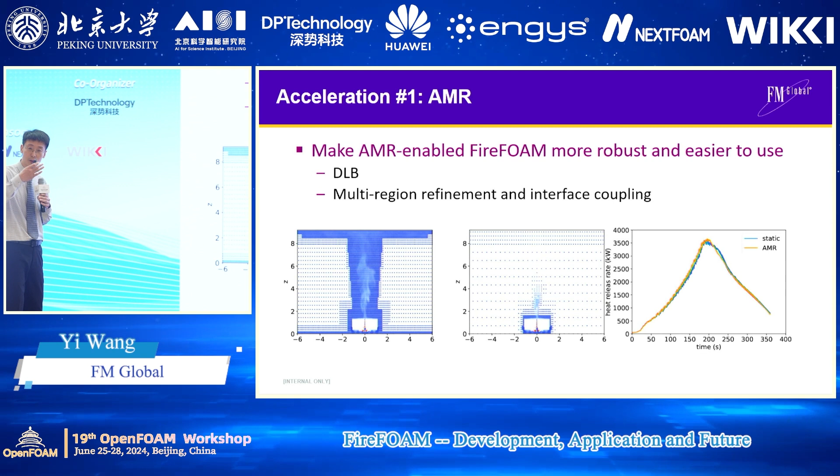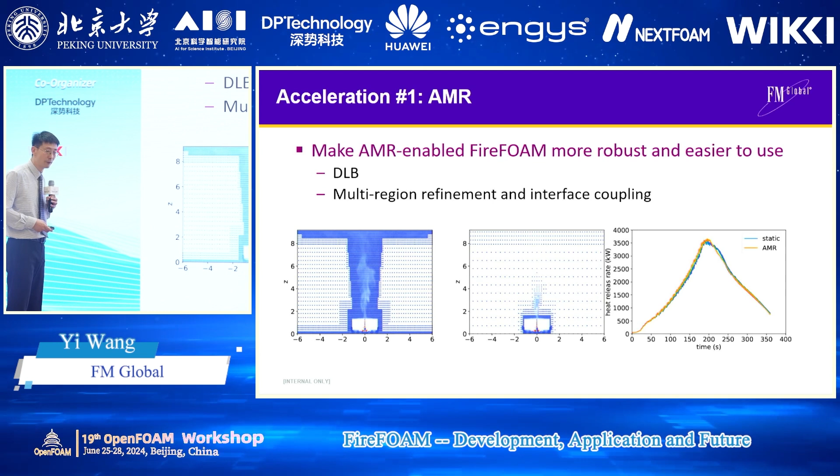Talking about AMR, Professor Jasak's PhD thesis is on AMR. So at this point we still cannot use the full AMR in our industrial simulation. I think we can do better. We need to do dynamic load balancing for all the different phases: solid, liquid, gas, and discrete phase. And also the multi-region refinement - when you have a 2-dimensional mesh, 1-dimensional mesh, how it's being coupled, how can they achieve this dynamic load balancing in the interface of coupling is important to us. We hope to make some progress on this topic with the help of Professor Jasak.

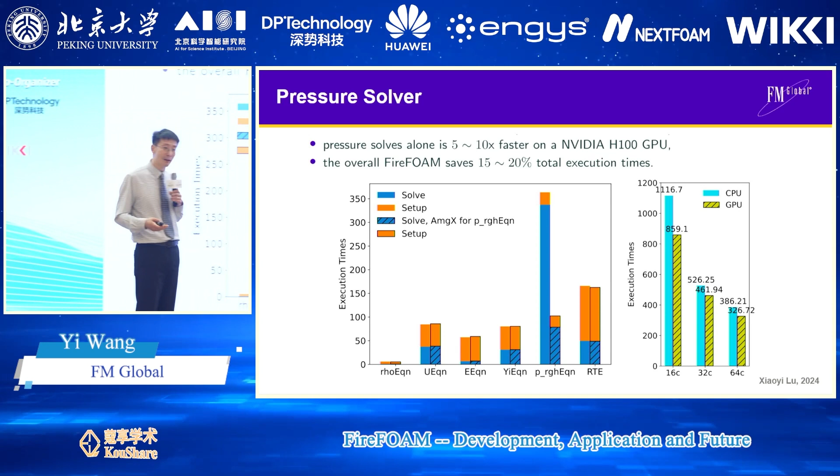By taking advantage of AMGX, we actually can reduce this by about a factor of 5 to 10 in the solution time. But overall, it's only 15 to 20% savings of execution time. If I have to buy a GPU to achieve this kind of speed up, I wouldn't make that investment at all - it's not good enough. But the reality is a lot of national labs have GPUs available.

If you cannot enable a GPU, nobody's going to allow you to use that. So there's a little bit of that. But also, this is just beginning.

I know there's a lot of ongoing work from Professor Chen's group trying to speed up this part, the orange part setup, and Professor Jasak is also mentioning their work. I really hope we can take advantage of their development next year to further speed this up. We're also looking at how to speed up the radiation part, either through GPU or other mechanisms.

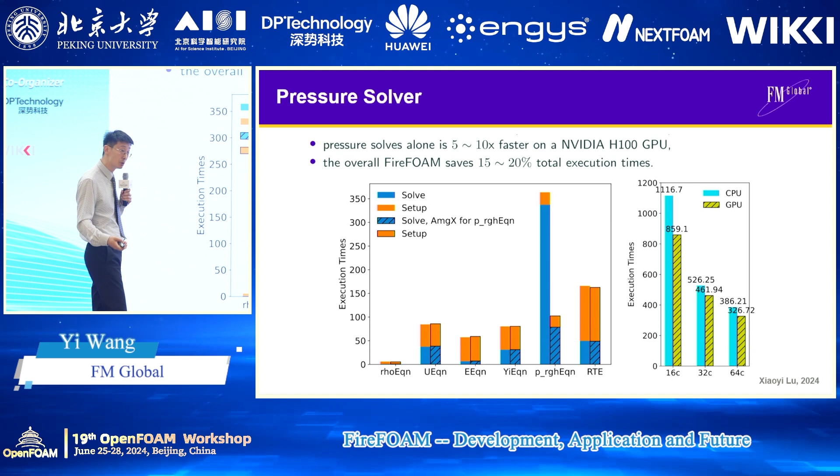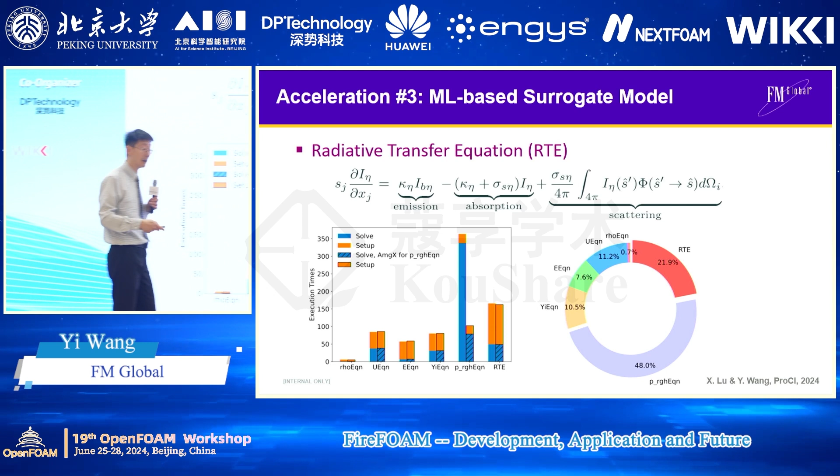I'm going to show a machine learning-based model. If you're looking at a machine learning-based model, radiation is really a very good candidate for that. It's not a transient problem. It's just a mapping between a temperature field and absorption coefficient field, which is your gas and soot composition, to your radiation intensity as a function of space and direction. There's opportunity there.

We're trying to use a neural network to map from one function to another function. This nonlinear mapping uses an operator neural network. We are using one variation called DeepONet, trying to map between two input functions: one is temperature, the other is absorption coefficient, and the output function is radiative intensity as a function of S, the space you need to project to.

There's a nice paper published by Professor Lu from Yale University talking about the structure of this DeepONet. Each input condition, the temperature and the absorption coefficient, is one branch net, and the projection space is a trunk net. You combine these. There's a theoretical mathematical proof that a certain type of neural network is always available as a mapping solution for these kinds of equations.

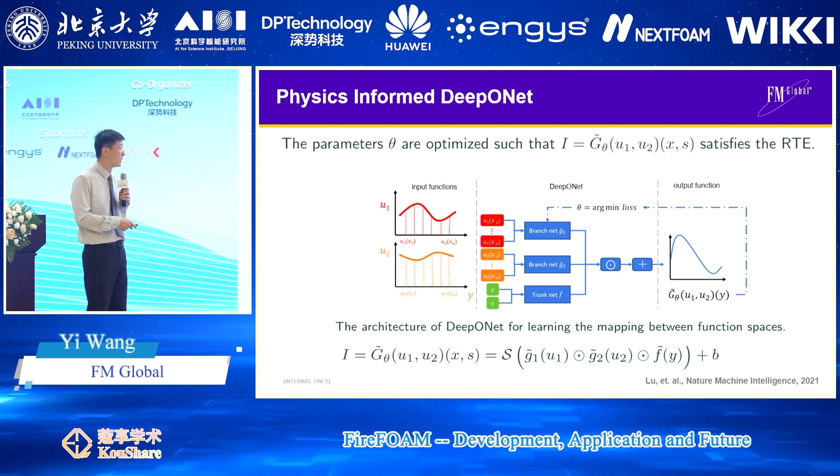I'm going to show a test problem for a one-dimensional case. You have a 1D slab at certain temperature, with a non-uniform temperature distribution within this one-dimensional direction. For example, in our training data set, we could have a parabolic temperature profile or a flame-like profile, and different profiles of water vapor concentration in the composition space. This is the training data set, and then we look at the evaluation data set.

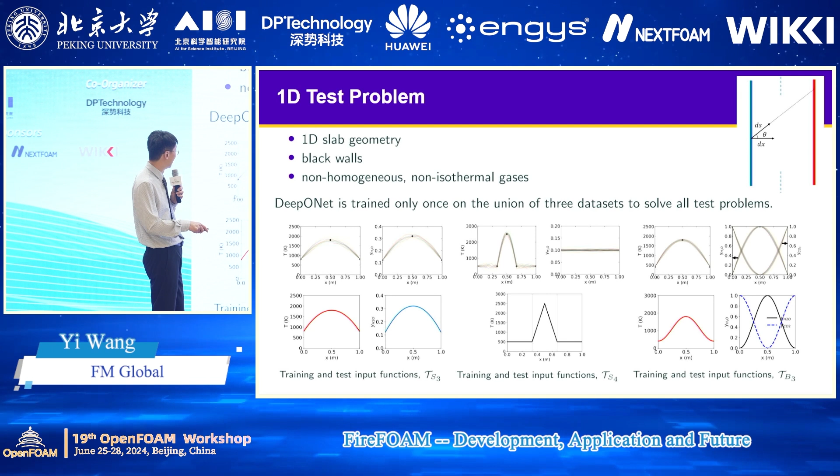We compare the radiation source term and radiation heat flux for different scenarios. The machine learning algorithm is actually almost exactly the same as our numerical algorithm, but it's about 10 times faster compared to the ray tracing algorithm. If you put this solution on a GPU, it's usually 100 times faster.

Currently, all this development is still a separate solver. It hasn't been fully coupled with FireFOAM yet, but that's the next step we're going to do.

Another very exciting improvement is that we also showed this algorithm working for a 3D problem, and it solves the inherent numerical ray effect. If you only have 8 solid angles, you basically get a big ray effect—you can see the distribution of heat flux is never uniform. It's really a solution inaccuracy because you don't have enough rays.

But with the neural network, you can infer any arbitrary direction and sum it up. It's really cheap, and it really solves the ray effect problem.

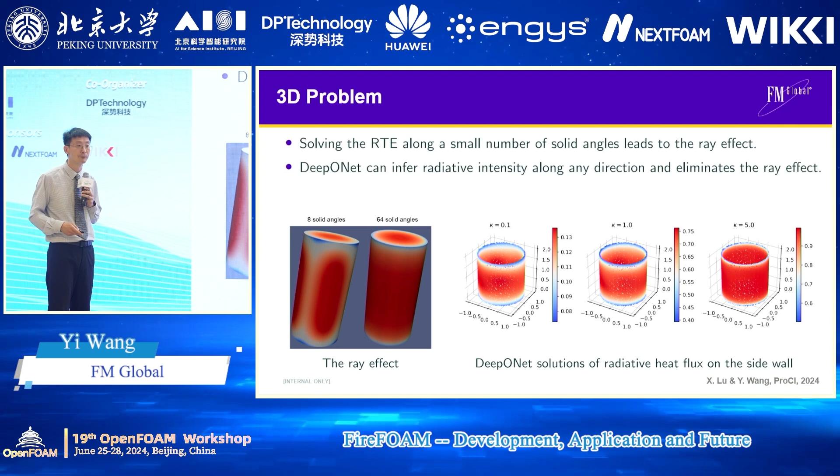The ongoing work involves trying to develop this neural network surrogate model for complex boundary conditions and complex geometry, and trying to improve the learning speed. We're also exploring both physics-informed and hybrid data-driven strategies. For example, the solution I showed before is physics-informed—basically we use the neural network to minimize the residual of the radiative transfer equation. The next step is really to couple another component with FireFOAM, a data-driven component.

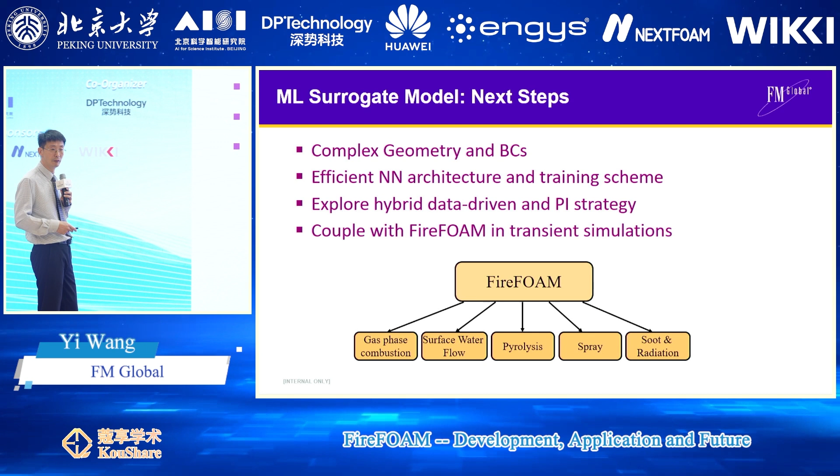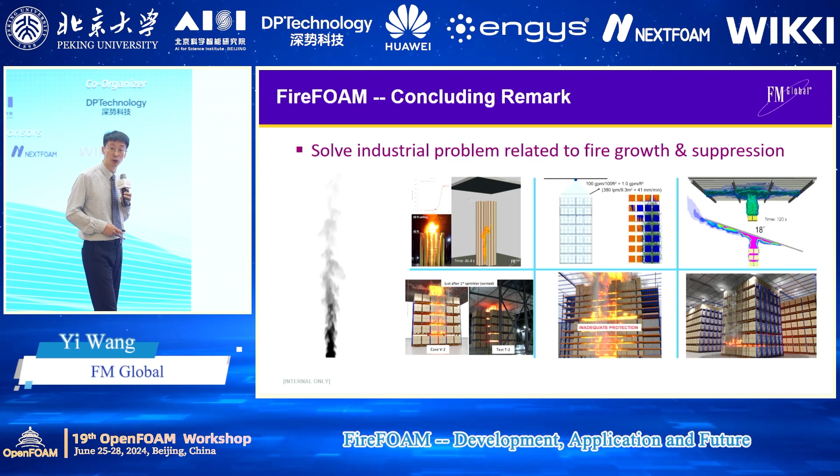Just to summarize, we started from here about 15 years ago, and we achieved a lot of growth, coupling all this 4M: multi-physics, multi-region, multi-scale, multi-phase. We are able to use the model to solve real-world problems. Some recent innovation related to spill and spread, related to geometry change, really pushed the coupling of multi-phase modeling to the extreme in terms of complexity.

We're working on new fuels. Battery is one of them. This is actually one of the pictures—it's a big jet flame projecting out in this direction that I showed.

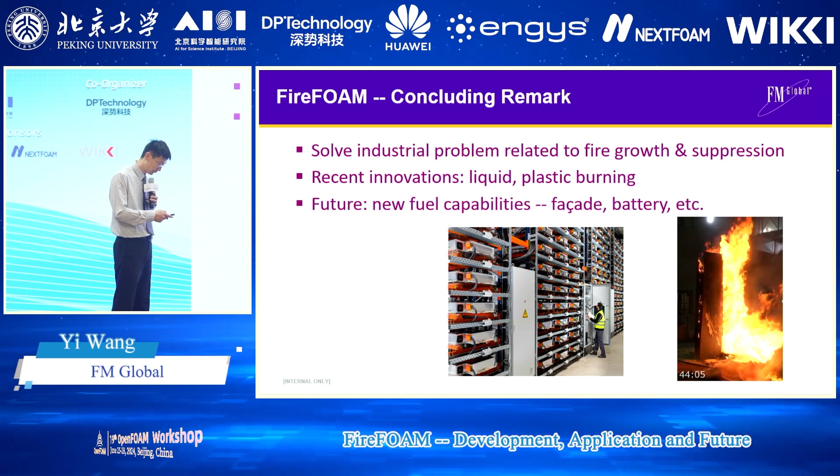We really want to use any methodology to speed up our simulations. It's extremely important to us.

I want to quickly thank our team. This is my colleague Ning sitting here. He's the author of a lot of nice work and animation I showed here, including the liquid fuel model. And Alex Chrisman, Xiaoyi Lu, and Daniel Mahalis, and also a lot of our alumni in the modeling team have contributed tremendously. FireFOAM is never feasible without experimental support. We have a lot of experimental people giving us experimental insight, small scale and large scale properties, and validation data for all kinds of physics, and also our management support.